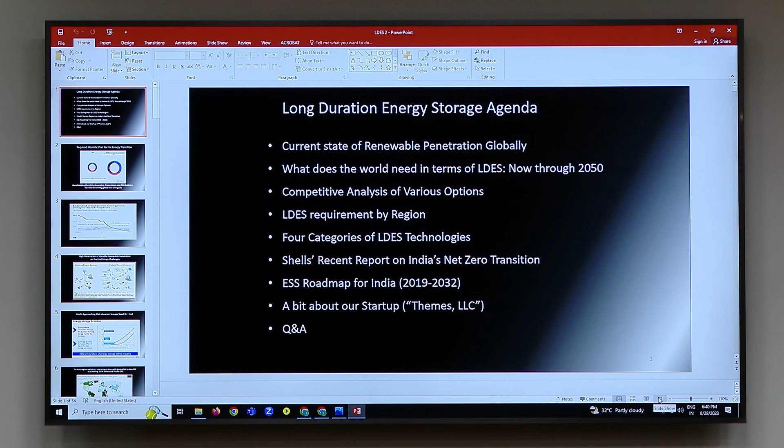Solar and renewable energy costs have come screaming down in the last 20 years. We're down to dirt cheap - in the Middle East it's 1 cent a kilowatt hour, in California where I live it's 4 cents a kilowatt hour. It's practically almost free electricity from solar. That's an amazing transformation in the last 20 years.

So there you go - see, I wasn't lying, right? 27 to 90 petawatt hours. I knew my numbers. And the renewable energy goes from about 28% today to 91%, and the fossil fuels have to go down to 5%. This all has to happen by 2050.

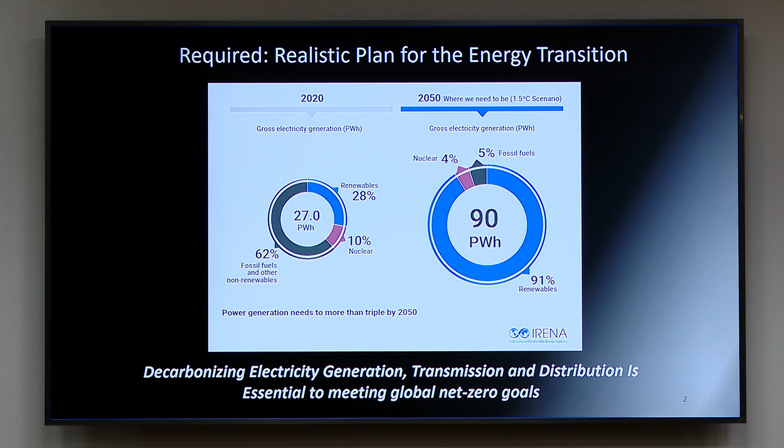You guys are all young, you'll see this happen. This we've seen. Okay, I'm going to skip this slide.

Basically, it says when I was growing up, the electricity system was pretty simple - there was a source, and you sent it to buildings and factories. Now you got a geothermal plant, a high-efficiency building, energy storage, a plug-in car, smart substations - so it's going to go all over the place. Smart grid. Life's getting complicated.

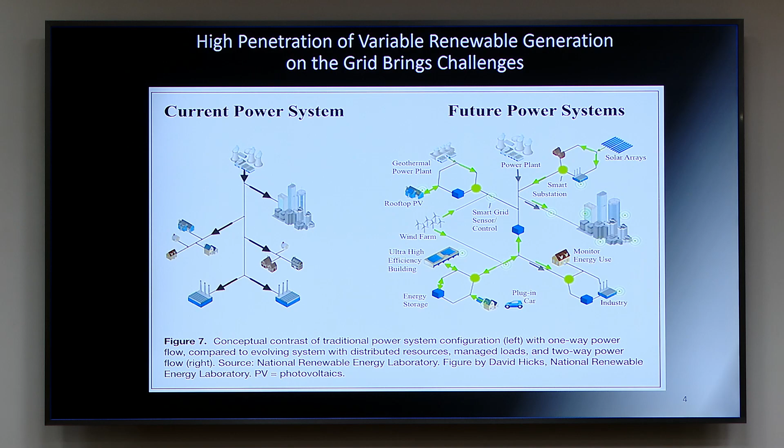Okay, this is an interesting slide - when do we need more hours of storage than a battery? What this slide suggests is you can get by with about 4 hours till you're at about 25% on the grid with battery storage alone. The minute you go up to 30-40%, you need more like 6 hours, and when you get to 50-60%, you get up to 10 hours of storage. At 100% grid, of course, you need lots of storage.

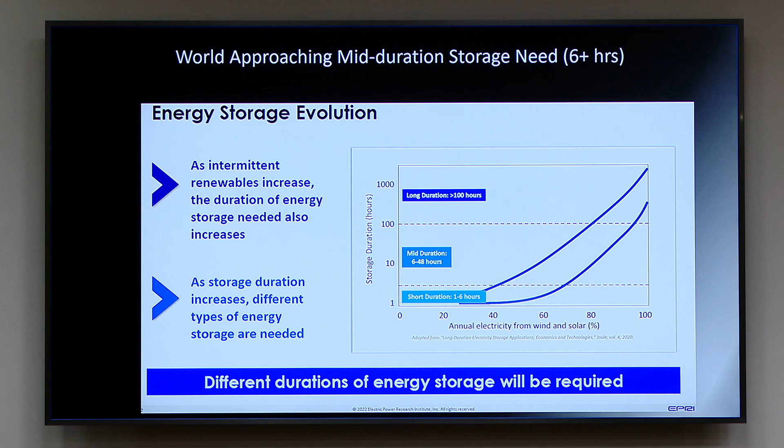So where is the world right now, and where is India today? It's a tough chart, I'll tell you what it says. For example, India is at about 20%, USA is at about 22%, you can see that here. Australia is 30, China is about 30.

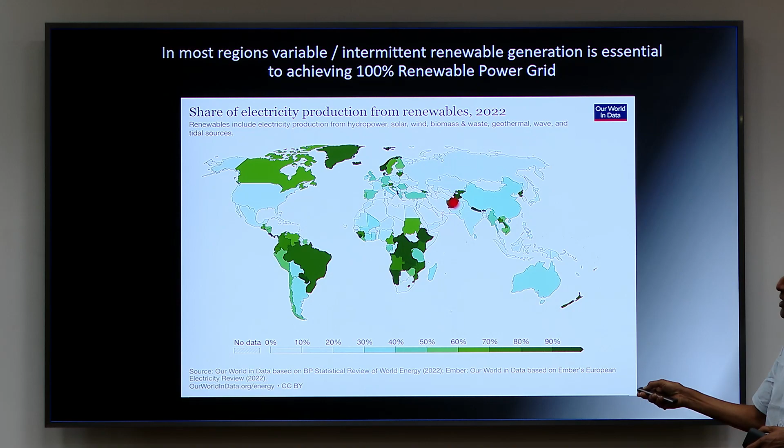And Canada is at about 67%. So you wonder, what are all these dark areas? They're all hydroelectric power - so Afghanistan, of all places, is 86% because of hydroelectric. There are lots of dams.

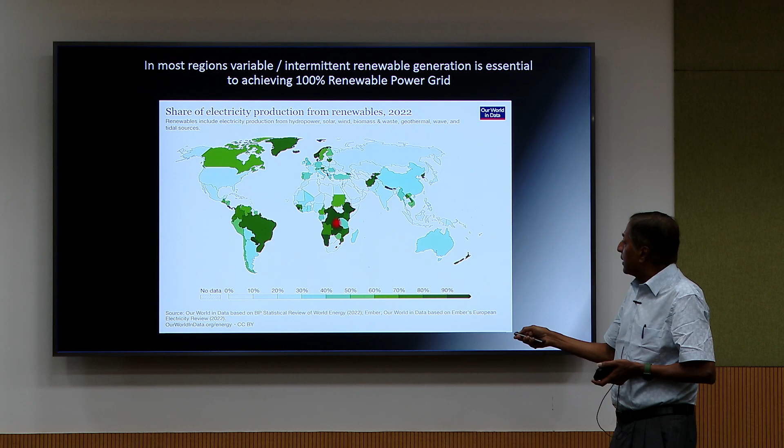Similarly, if you go over to Iceland - I've been there - there's geysers everywhere, geothermal and hydroelectric. Greenland is all hydroelectric, and in Europe there's a bunch of hydroelectric too. So anywhere you see dark, it's hydroelectric, not solar or wind. The guys doing solar and wind are kind of at 20, China is at 30.

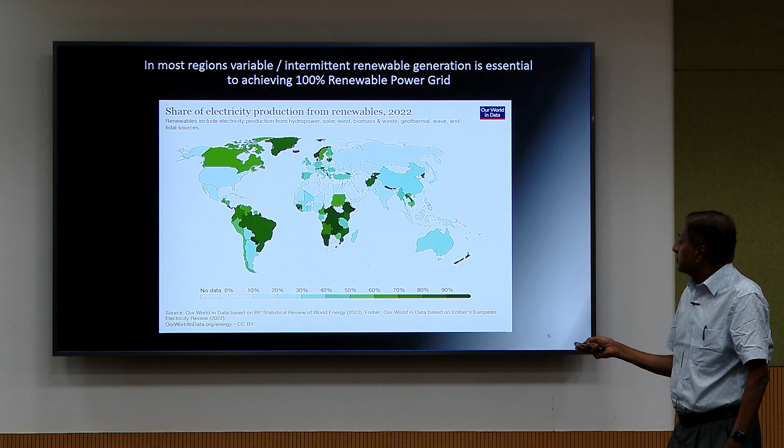So we're right at the cusp of needing more than batteries, we're just moving into that.

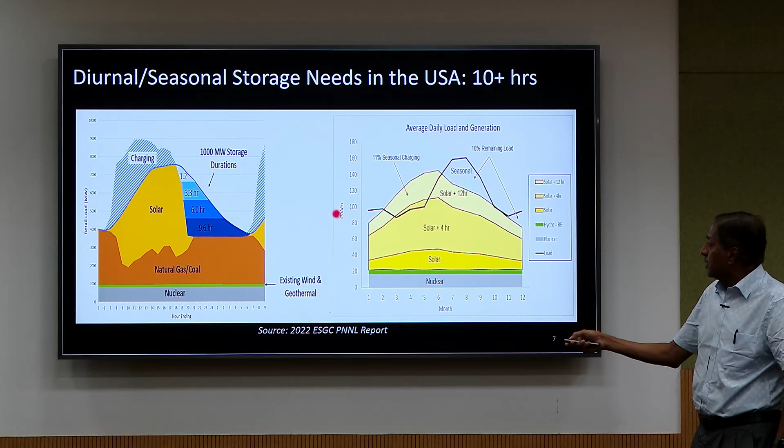So I'm going to skip this slide because it's another illustration - well, maybe I'll talk about it. This is a diurnal cycle, in Arizona in the US. So the sun comes on, you charge whatever your storage system is, and then the solar energy climbs up, and at this point the sun stops shining - boom, you're done.

Now you got all these durations until the cycle starts again. So here's 1.2 hours of something, 3-hour battery. Now you need 6 hours of something and 10 hours of something in order to get there, right? We don't have any of this. All we have now is this stuff with batteries.

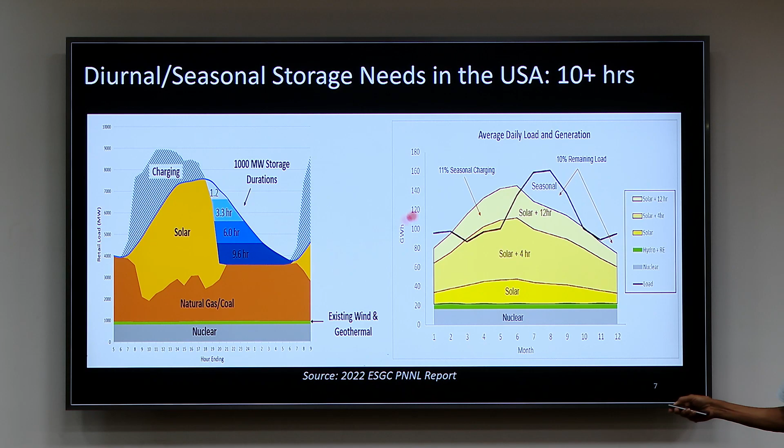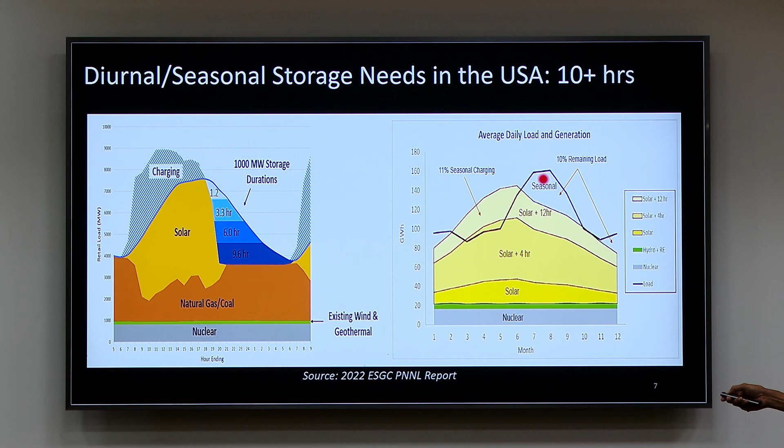Similarly, if you look at a calendar cycle, this is a full year, again in Arizona, and Arizona is picked because it's a sunny climate, kind of like most of India. So here is hydro plus renewable, the nuclear is the gray, here is solar, and then you need battery. Solar plus 4 hours, solar plus 12 hours, still doesn't get you there. There are months in a year that even 12 hours of storage is not enough. We're starting to get to that point in high solar conditions already.

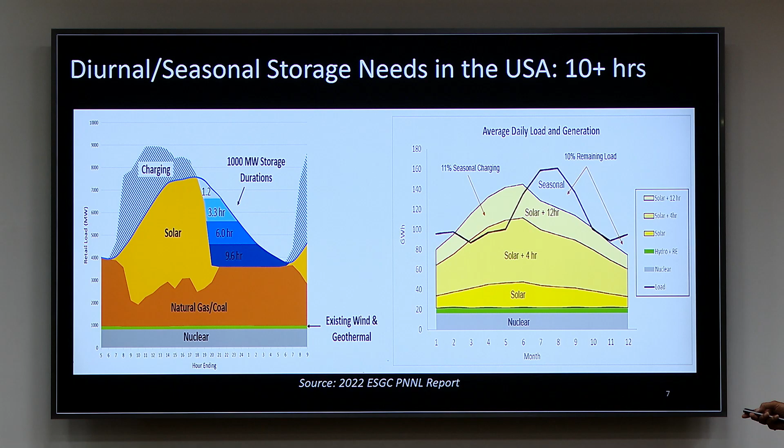So batteries are here. Batteries are pretty cool. They're good for, I think this is very generous, batteries are good for 2 or 3, 4 hours, not even that much.

This is the one I'm going to talk about, compressed air. I'll tell you what that is. Pumped hydro - how many of you know what pumped hydro storage is? Does anybody know? What pumped storage is, you have a mountain, you have a lake at the bottom and a lake at the top of the mountain. When the sun shines, you pump the water up the mountain. And when the sun stops shining, the potential energy, the water flows down and generates power. The problem is geographically, you have to build it next to hydroelectric dams, which is what India is trying to do.

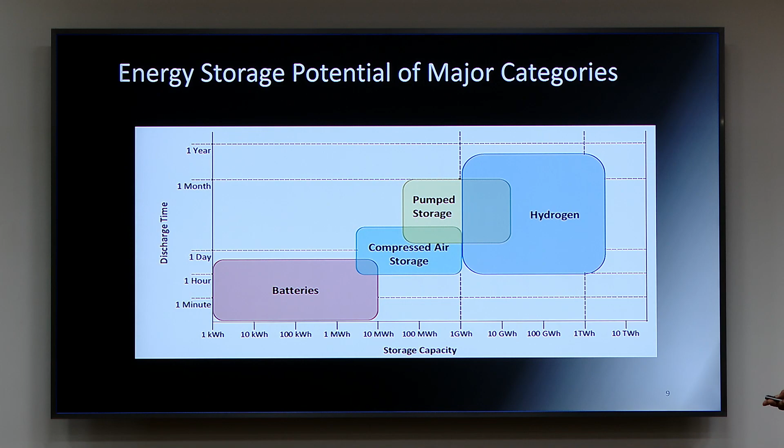And then hydrogen is the big unknown. Everybody talks about hydrogen. I don't know about it. We'll get there in a minute, we'll talk about it. This thing doesn't move very quickly.

Okay, so what the Department of Energy, the Pacific Northwest Lab puts out a report every August - this is 22 August. And they basically say that the cheapest form of energy at scale, if you want to build 100 megawatts and have multiple hours of storage, is compressed air energy storage and pumped hydro. That's what these guys are. The batteries get very expensive - lithium-ion batteries just take off in cost after a point. So it's one of the cheapest ways to do it.

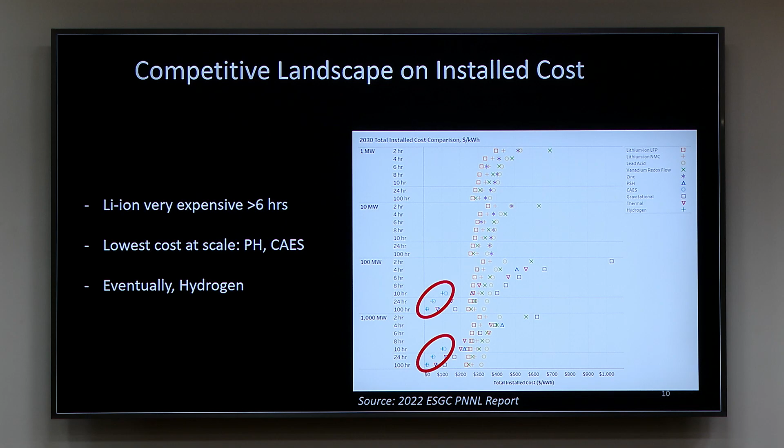Looks like it takes 3 presses. I'm going to skip this one. This is about a lot more detail, I don't have time to read.

They can do 15 gigawatts of batteries if you want, but how do you get 2 gigawatts of something longer than batteries? They got nothing. So they're desperately talking to us about what we're trying to do. There's billions of dollars being put out by the Biden administration, and I'm hoping to get a chunk of it. I'll tell you in a minute.

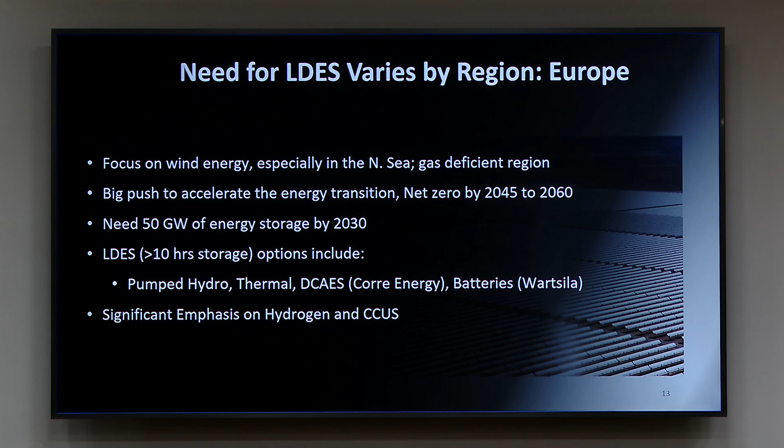I'm going to skip a couple of these next slides because it's taken a long time to change slides. Maybe I should sit there and do it, or have somebody sit there and do it for me, because this isn't going very well. See if we can get her to come. Yeah, see, this is, okay. So UAE, Saudi Arabia, I'm going to skip.

See, now it's going fast the minute you call for her.

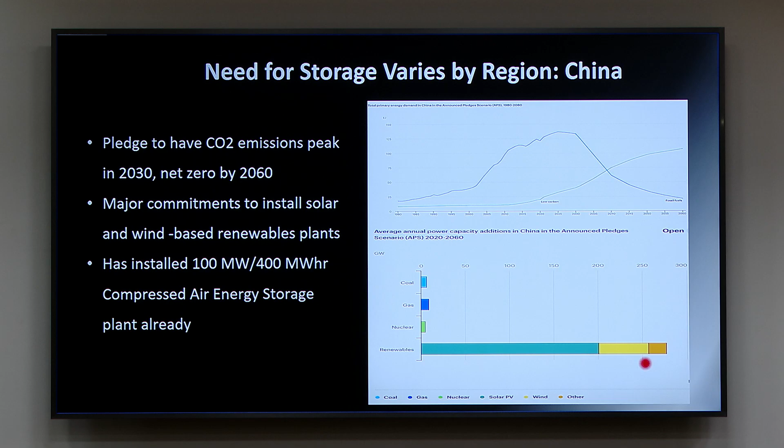So India - what are we doing? We've got 70% of our energy coming from coal. You all know that, right? That's why it's a bit funny for me to see all these electric vehicles. As long as you get electricity from coal, what are we doing? Pollution is less on the road, but your electricity is coming from the worst fossil fuel on the planet - the most carbon dioxide.

I think Prime Minister Modi has said net zero by 2070. He wants to build 450 gigawatts. Currently, batteries are 2 to 4 hours. Long duration storage is pumped hydro - it's the only thing being looked at. I'm trying to introduce this compressed air business. I'm talking to folks in India. And that's what's going on in India.

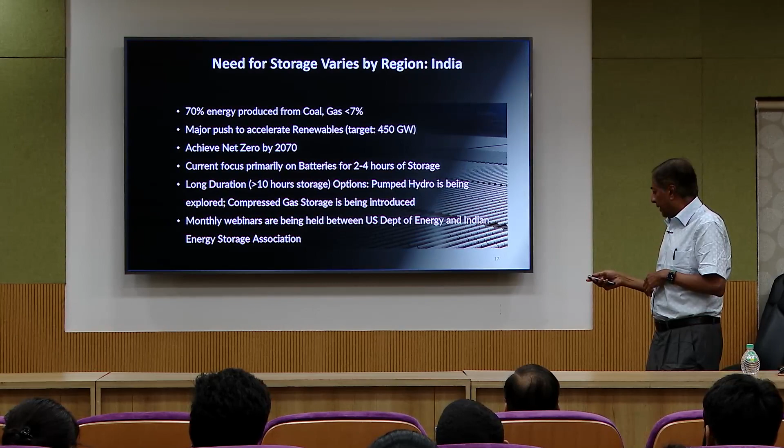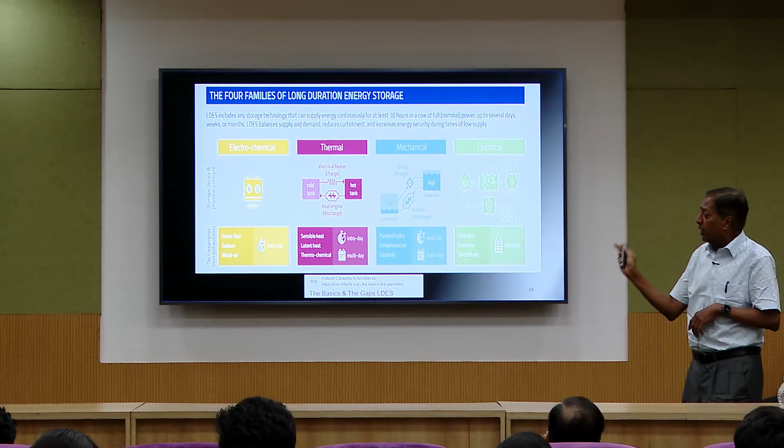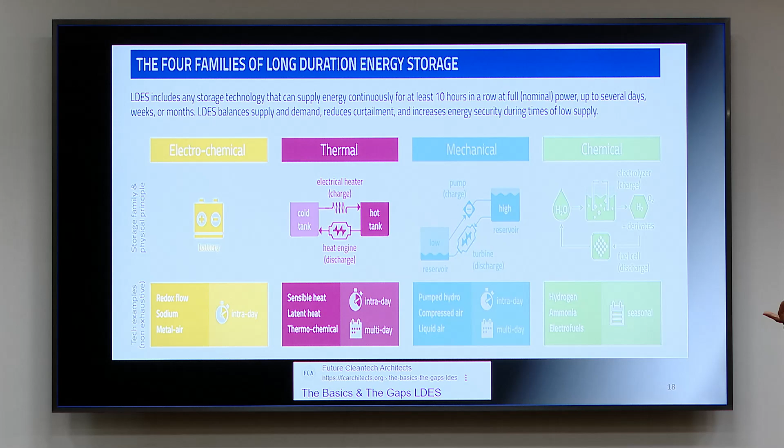So there are four primary forms of energy storage. Electrochemical is batteries, and you all know about it - I'm going to skip that battery topic. Thermal is an interesting one, I'll tell you a little bit about thermal. Then mechanical is the other one, where compressed air is a part of it. And then chemical is hydrogen and ammonia. By the way, when I retired 5 years ago, I had zero knowledge of this subject - this is what I've gleaned in just the last few years of my startup.

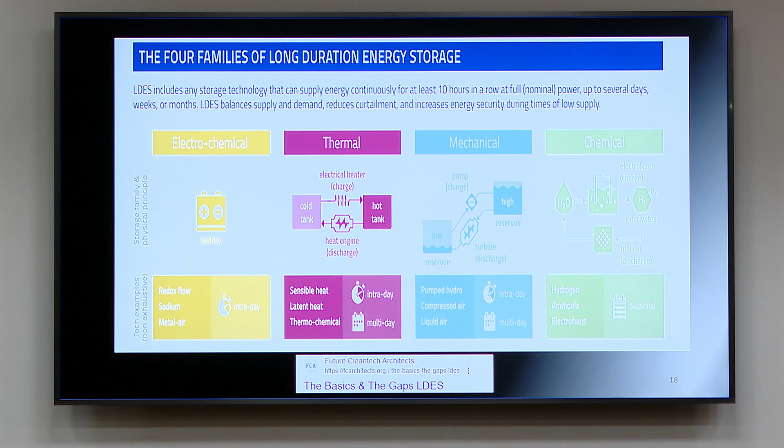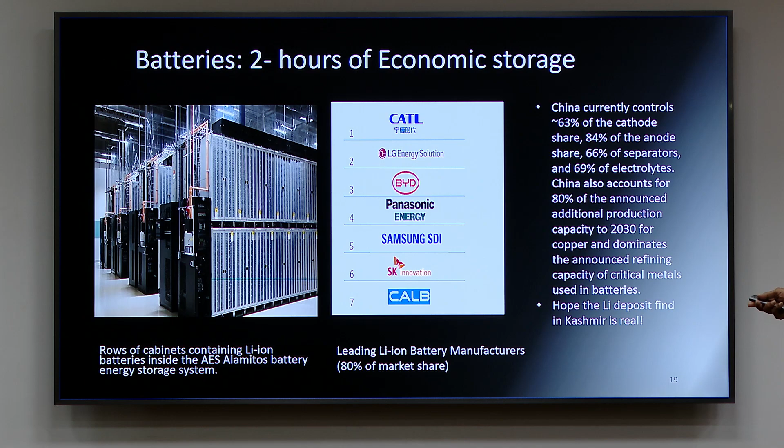I think this is batteries. I'm not going to talk about batteries, except that China holds 63% of all the raw materials. They're kind of screwed if you depend on them. And all the manufacturers are largely Japanese, Korean, and Chinese. You guys know this.

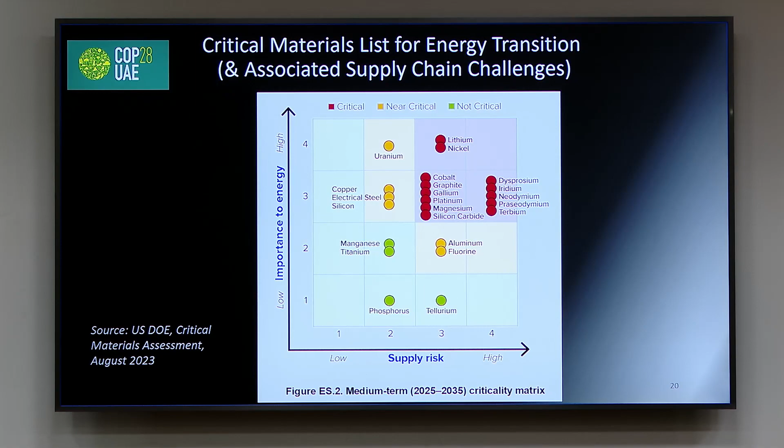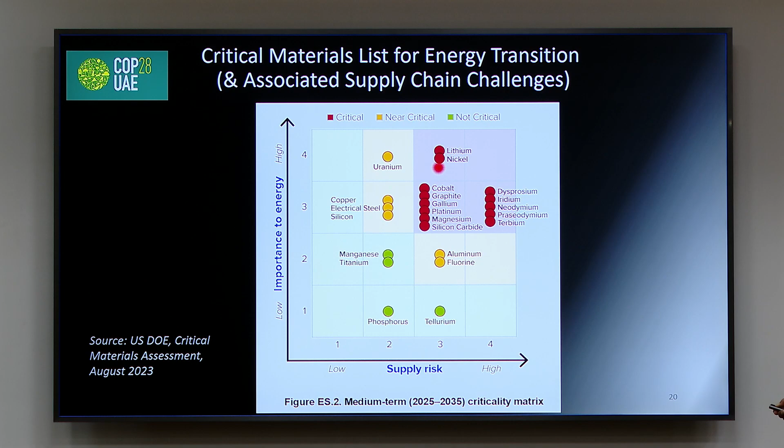Now, this one is put out by the Department of Energy just this month, in early August. What they're pointing out is batteries are fine, but what they plot is low to high supply risk and the importance to the energy business. Basically, red means critical, green means not critical. Look at the stuff that's critical when it comes to batteries - of course lithium and nickel, but look at all this: cobalt, graphite, gallium, platinum - all this stuff that China largely controls. That is the problem with battery solutions alone - you're going to be stuck with materials that are hard to get.

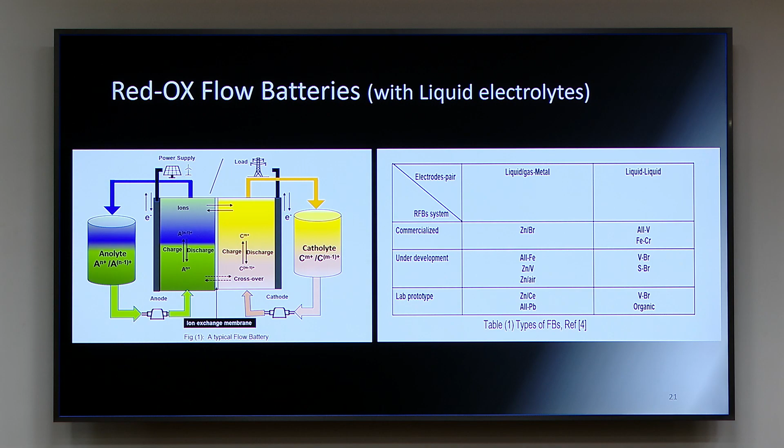And there's something called a flow battery that's always been there. It's supposed to get up to 10 hours, but I haven't seen it yet. I'm going to skip this one to go to the next one.

So the big news in America is a company called Form Energy. It was invented by a Chinese professor at MIT. What he did was dust off a 50-year-old technology, which is basically iron-air batteries. His idea was air is free, iron is cheap. The idea is rusting the iron and derusting the iron in the cathode and the anode - you let the iron rust, then derust at the other end. Seems very simple. They have raised $1 billion with this idea. They are building a $760 million factory to produce these batteries in West Virginia. This is the talk of the town - they've raised a lot of money, but the jury's still out on this very old technology.

The reason it's been revived is that when it was worked on 50 years ago, the energy density of this battery was only about 350 watt hours per kilogram. These guys have gotten up to about 1200, 1250 - so they've got to pack the energy density. We are all watching it. If this succeeds, it's wonderful, but it's a lot to ask for.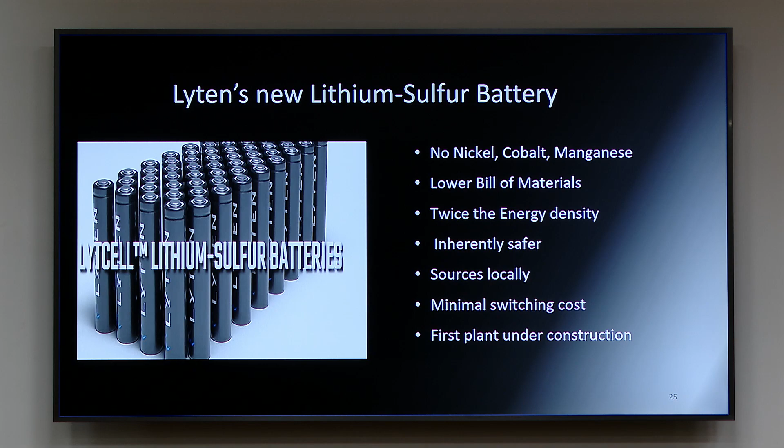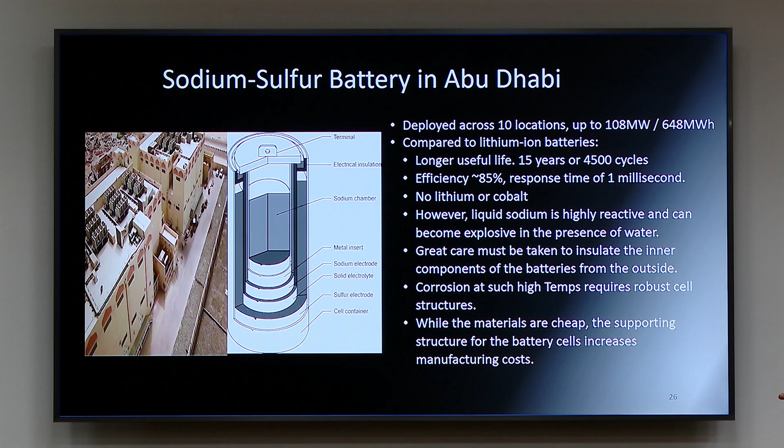So it scares me that you can't scale this up. You don't want to build something that's inherently unsafe. Not that lithium batteries are all 100% safe—they catch fire, as you know.

But this is pretty unsafe to me. So, okay, thermal, right? This is an interesting one. So I've talked about batteries already, that's electrochemical. The second type of storage is thermal. You know what thermal is, right? Hot and cold.

So there are a bunch of people. There's an Indian lady called Ramya Swaminathan, who's the CEO of Malta. She's raised 86 million dollars. And it's a very old technology—molten salt is very old. Canada has been doing this for 30 years. So when the sun shines, you store the heat in the form of molten salts. And then you also have the coolant side. And then you take that heat and turn it into electricity. That's one way to do it.

Their costs are going up. They're struggling, actually. It's a tough thing to do. Molten salt is not easy to manage.

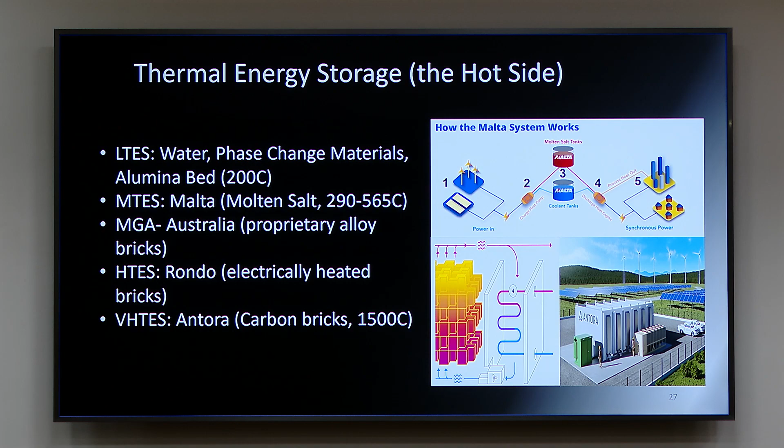There's a couple of companies—one called Rondo, one called Antora. These are both in California. Their idea is to take a wire and stick it in a brick. One guy uses a cement brick, the other guy uses a carbon brick. They claim that they can heat that brick up to 1200 to 1500 degrees centigrade. They're generally pretty good insulators. So when the sun shines, you heat the heck out of these bricks, and when the sun stops shining, you convert that heat into electricity. They've raised a bunch of money, which is amazing to me. So these guys are going on.

And then the other side of it is the cold side. There's a company in Israel called Nostromo, which takes energy when renewable energy is available and makes ice, basically, ice and ice slurry. So you can either take the energy and make hot stuff, or you can take the energy and make cold stuff. And guess who else is doing it?

Professor Satya Seshadri here in IIT Madras is doing it. How many of you know about this? Oh my gosh. What Satya has done—I've toured this laboratory, I come to India 3 times a year. What he does is take renewable energy and make ice slurry, which is pumpable. It's even better than ice—if you form ice, you've got to chip it and make it into something that will flow into a pipe. Professor Seshadri comes up with this ice slurry, circulates it, and has air conditioned the setup outside the building here. His entire building is air conditioned with his own process. Excellent stuff. I would urge you to go and check out his lab. He's done it himself. He's trying to now commercialize it. So that's one other way to do it.

And then this is the one I don't like at all. It's the dumbest thing I've ever heard. This thing on top, a company called Energy Vault—their idea is when the power is cheap, you raise bricks as high as you can, and then when the sun stops shining, you drop the brick and create energy. That's their whole idea, gravity, they call it. They couldn't get money and build a plant in America.

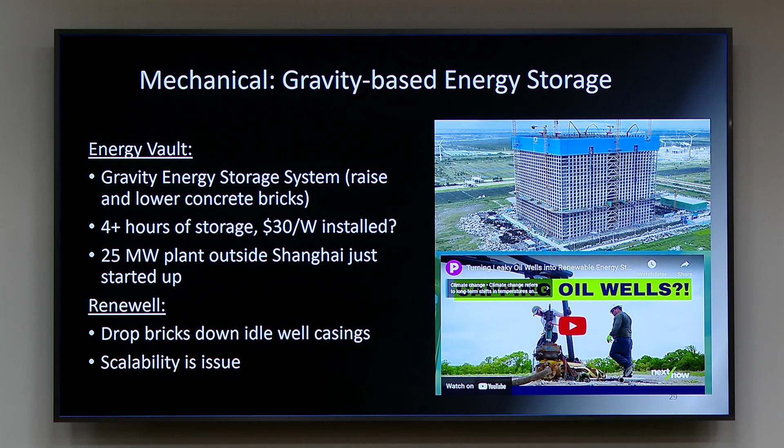Now there's another company that has a similar idea to mine, which is using idle oil wells. But they're dumb too. You take an idle oil well, there's a casing in it, and they want to drop a brick into the casing. Basically it's the same idea as the one on top, except rather than building up, you drop it down a hole in the ground. The problem is the casings aren't linear, so when you drop it, it's going to get stuck somewhere on the way. These guys have raised a bunch of money. I don't understand it anymore, but the VC system in America is crazy.

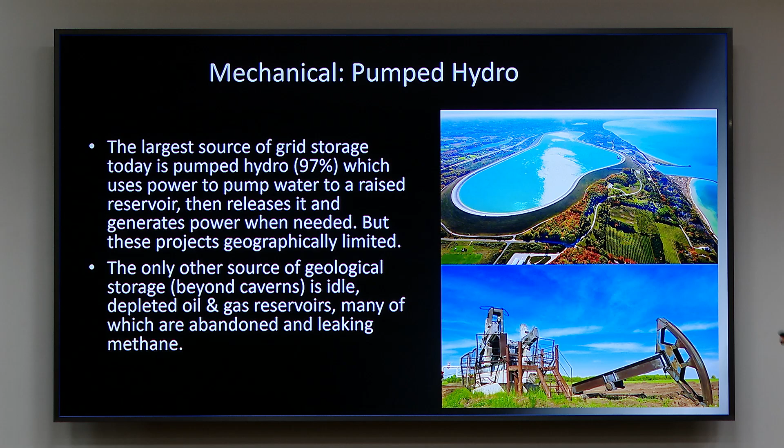So my idea is there are a whole bunch of abandoned oil wells in America, and these have unlimited storage where the oil used to be. 150 years ago we drilled a hole, all the oil is gone, there's nothing left, so people walk away. Here's an abandoned well in Central California - the operator didn't fix it up properly. When oil prices fell, he just walked away. So now you have an opportunity to store energy, an unlimited amount of storage space, in an idle oil well. That's the concept I'm peddling. I don't know if it'll work or not, we'll see. Okay, these other guys are also looking at oil wells, but it's an equally bad idea.

You can compress air, it's a compressible fluid. You can compress it to 75 bar, 100 bar, and get energy density. These guys decided to do what they call reversed pumped hydro - rather than a mountain, why not pump water underground? But water, as you'll remember, is an incompressible fluid, so it can't have much energy density. The first time they pumped water underground, it leaked out and all went away. Bill Gates funded this, by the way. They raised 10 million, did an experiment, the water disappeared. So now they're going to drill their hole to make sure it doesn't disappear, and Bill gave them another 10 million. The energy density of the water is such that I don't know how much energy you can get out of drilling these holes. And if you drill your own hole, you're screwed because the cost is very high, you won't get permits. So this is another bad one, but there's Bill Gates himself, looking at it, and he's put 20 million down. Good luck with that - it's not going to work, I think.

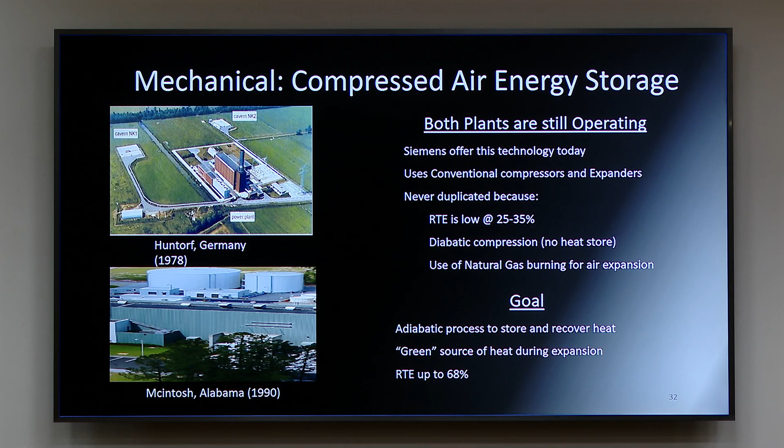Go ahead, I'll skip this one. Let's keep going, there's another company. There's only one company in the UK, and Professor Narasimhan knows about this - we've talked about it.

That has said, I don't want to find holes in the ground. How about if I liquefy the air? If I liquefy the air, the liquid air is 1/700th the size of air. So you can compress it into a liquid - it holds huge energy density. So then when I need the energy, I will vaporize the air, turn it into regular air, high pressure, and expand it. So that's their idea.

The only problem with that is now you've got a cryogenic setup. So it's not just compressing air - now you have to go through refrigeration cycles and actually liquefy the air. Then you've got to heat it up and expand it. You can do it. Then the two edges are basically compressed air storage like I'm talking about. In between, you need refrigeration and cryogenic storage. So the costs double. The good thing about it though is that you don't have to look for holes in the ground - you can build this anywhere.

The only ones that could do it - Professor G. Venkatarathnam here, wrote the book on mixed refrigerants you need to use here. So pre-COVID, I came and met him. He had already built a liquid nitrogen pilot plant here. And I was talking to Professor Venkatarathnam and Professor Shankar Narasimhan, who's sitting here, saying, why don't we turn that into a liquid air pilot plant? I mean, we still want to, but COVID came in the way.

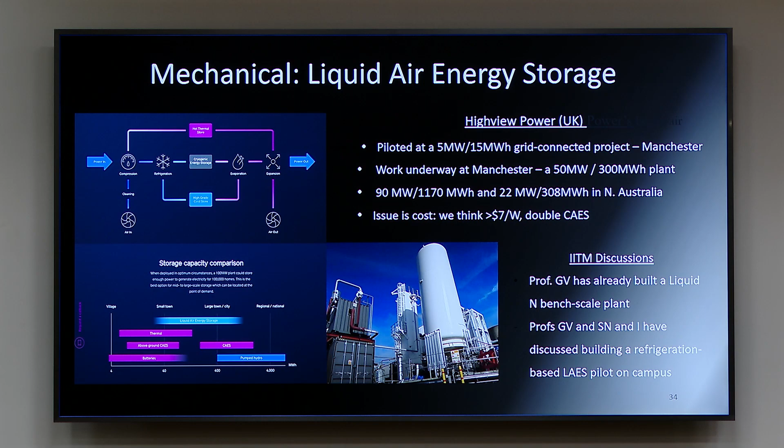Go ahead. Okay, so this is a controversial subject - these are my opinions only, you can argue with me later if you want. The whole world is agog about hydrogen. India is going to do green hydrogen. Tata is getting into it. Everybody's talking about hydrogen. Hydrogen for transportation makes perfect sense.

So right now, to make hydrogen out of water in an electrolyzer is about $6 a kg. You've got to get it down to about $1 a kg, one sixth the price, to make it economical. But that's happening - like solar electricity, this will come down in cost. I think that'll happen. Once you do that, then you can put this hydrogen into fuel cells in cars. You know there's a Toyota car, there's a BMW car that runs on hydrogen. And the way they do it is they have a high pressure hydrogen tank compressed to 600 bar at the bottom of the car.

Hopefully you won't have an accident, but it's pretty thick walls. That hydrogen supplies a fuel cell and the car runs on a fuel cell. It's not EVs, okay? It's a hydrogen fuel cell car. Those cars exist. Down the road, they can do that for trucks. Just everything gets bigger, right? And I'm okay with that.

There are also people trying to replace the internal combustion with a hydrogen combustion engine. Chevron's doing this too. Instead of a direct ignition spark ignition IC engine, it becomes a compression ignition engine. Diesel cars are what's called a compression ignition engine - there's no spark plug, so you compress it to a high enough pressure that it lights itself. That technology is being adopted for hydrogen now. If that works out, I'm okay with it. Build hydrogen engines in cars - the efficiency is terrible, but you can do it.

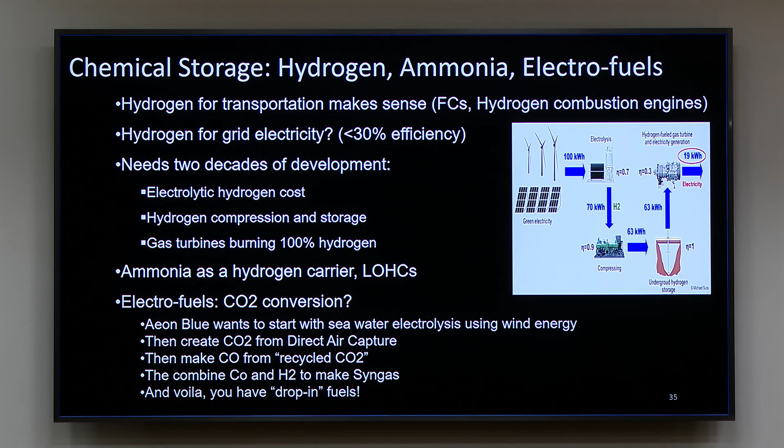Now there's just enough time to talk about my startup. Just bear with me for a few minutes, I'll tell you what I'm doing. So I came up with the name Thermal Mechanical Energy Storage - it's got a nice ring to it. It's called THEMES. And our goal is nothing less than 24/7 dispatchable power.

Dispatchable means you can dispatch that power anytime you want - it's not curtailed for several hours or anything. 24/7, can run on renewable energy. We use off-the-shelf surface equipment - compressors, expanders, heat exchangers, hot water tanks are all off the shelf. We repurpose subsurface infrastructure where oil used to be.

Highly scalable, right? We can go to 200 megawatts easily. It can enable 100% renewable power for industrial operations today and enable a 100% renewable grid in the future.

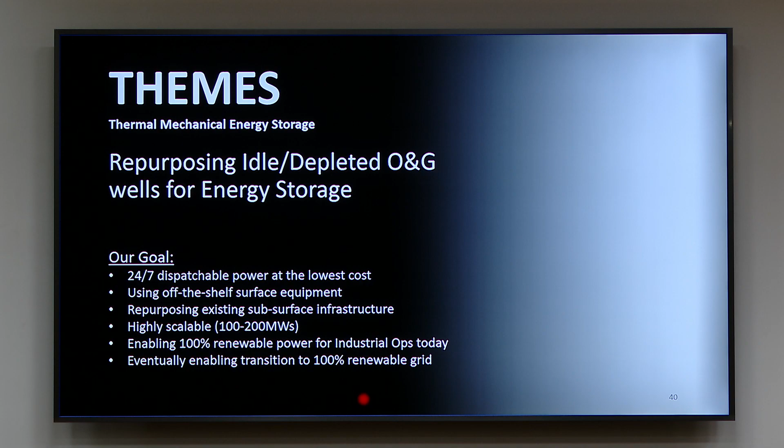So how do we do this? My co-founder spent his whole life in the oil industry looking at the subsurface. We call it upstream, but it should really be called downstream. Upstream in the oil business is how you drill for oil, how you maintain these wells several thousand feet below. He knows all about that. I don't know much about that, but I know how to build plants on the surface. So we were a good match.

We formed this company about a year ago. This is not the company I was with in the beginning. We both started with a company called EIC, and they had some issues, some technology development that had to be done. They were going for 100 hours of storage. What we found out, as I showed in the first few charts, is that the world doesn't need more than 10 to 15 hours for the next 20 years. So why should we do a startup to try to get 100 hours? The world doesn't need it. So we both quit and started our own company, and we've been at it for a little over a year now.

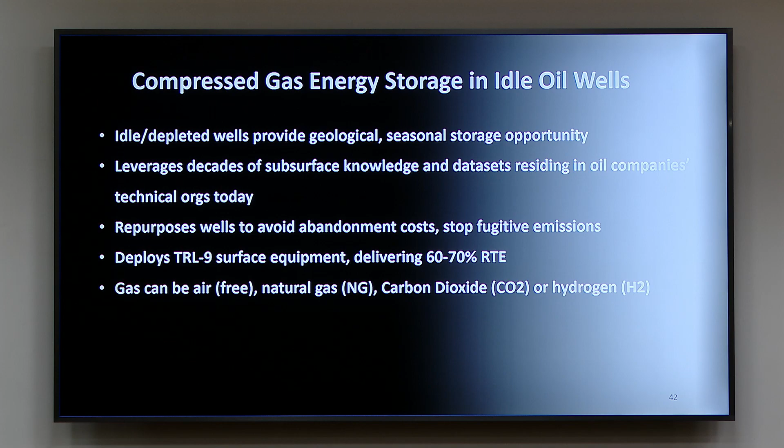The idea is you've got depleted oil wells and decades of subsurface knowledge. Every oil company has data logs on all those wells that have become idle - detailed data on rock porosity, permeability, all that. Right now many of those wells are leaking methane, which is 30 times worse than CO2. So the idea is you go in, plug it off, stop the methane leak, seal the layer where the oil used to be, and now store compressed air. The gas can be air, natural gas, eventually CO2.

The US has about 3 million abandoned oil wells, and a chunk of them are leaking methane. Methane emissions from abandoned US wells are equivalent to 8 million CO2 equivalents a year - a major problem the Biden administration is trying to solve.

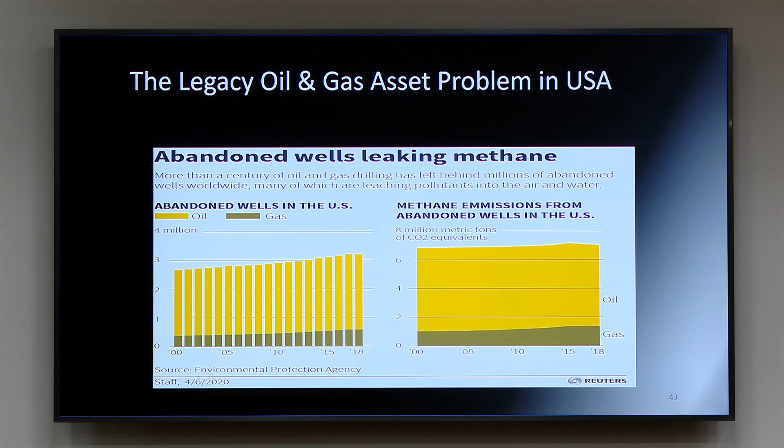The way we're doing it is a compression system and expansion system. When you compress, you store the heat - I store it in hot water. Then when the air comes back up, it gets heated by that hot water and goes through expansion. What happens in the well itself is where all the trick is. Everything on the surface is known - Siemens will build it for us. I went to Nuremberg last month and signed a deal with Siemens; they're going to build that surface facility for me, they know how to do this. What nobody knows is how you do this part in the well.

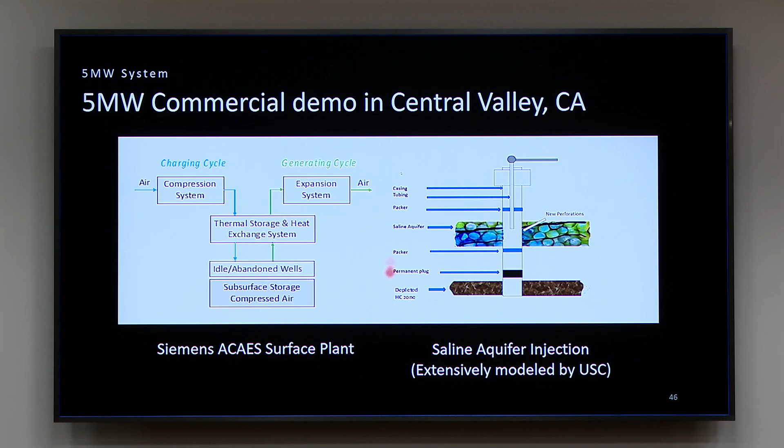Then we're going to pump the salt water out of the aquifer and create a giant air bubble here, in here and here. It stretches for miles. Every day we'll only put 1% of the air in and take 1 or 2% of the air out, so it's an isobaric, constant pressure operation. The air will sit there in a giant bubble, it's not going to go anywhere. It's contained by the pressure of the aquifer.

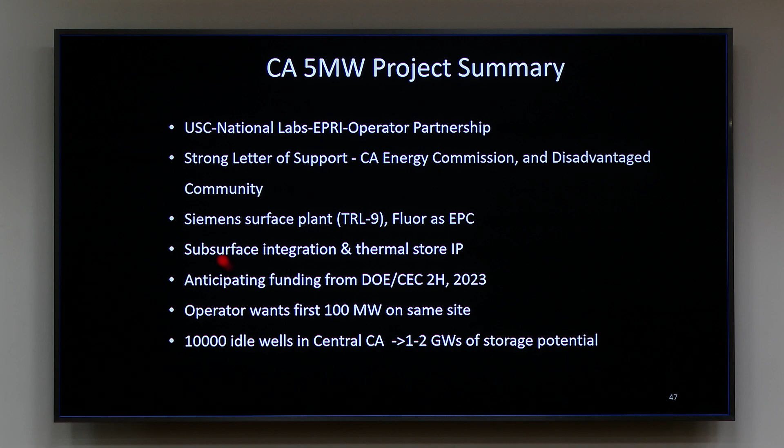So we've got a 5 megawatt project. We've got University of Southern California, 2 national labs, an electrical power institute, and an oil company operator all signed up with us. We have very strong support from the state. Siemens is going to build the surface plant. Subsurface, we have all our IP. We expect to raise $100 million, touch wood, next month, and if we get that money, we're going to start the project very soon.

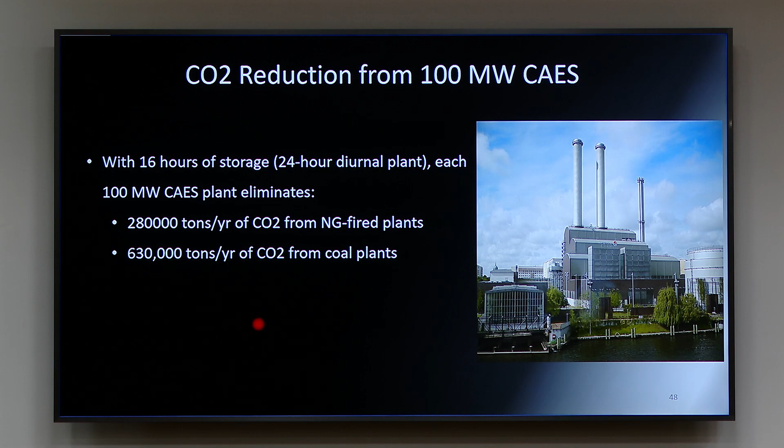Somebody asked me how much CO2 do you save by building it, because they can't think of energy storage. So I did this calculation, it's pretty simple. If you store energy for 16 hours in a 24-hour cycle, every 100 megawatt plant eliminates 280,000 tons per year of CO2 from a natural gas fired plant, and it's 3 times that from a coal plant in India. We want to build 2,000 - basically 20 100-megawatt plants - in the middle of California alone, let alone India, let alone the Middle East, let alone the rest of America. The potential is 20 100-megawatt plants in the middle of California alone.

So back to India. What do we need in India? As I said, pumped hydro is what they're working on. So the question is, what is the opportunity for this idea in India? I'm going to skip through these. One study was done in 2018 by a Finnish company - I usually give attribution at the bottom for all my slides. They looked at permeability and porosity, and said yeah, India's got some chance.

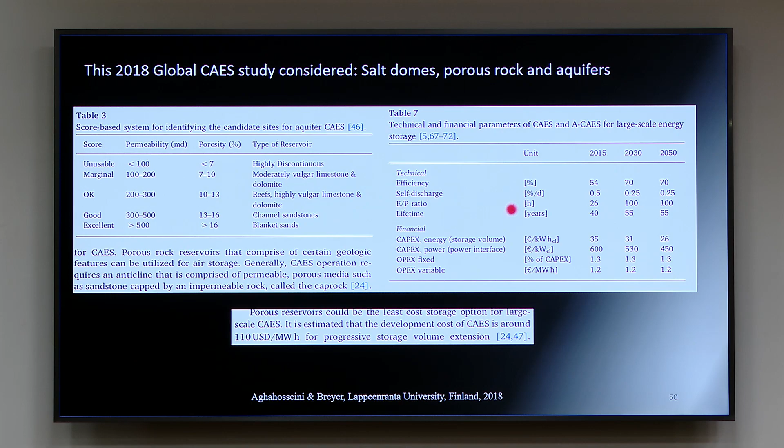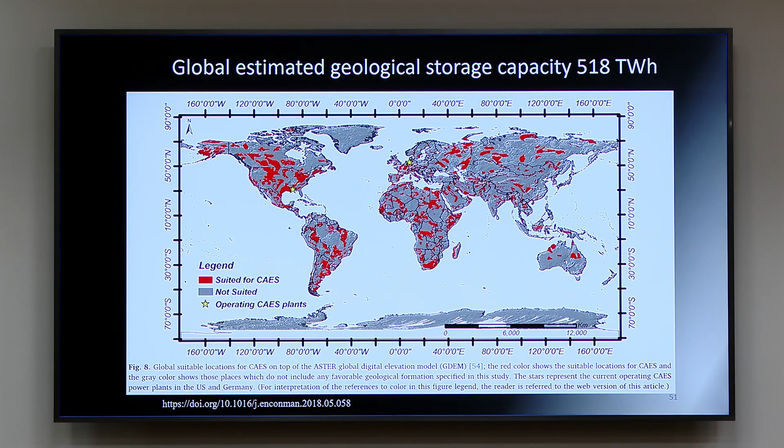So a study was done more recently, including the United Kingdom and Malaviya National Institute of Technology in Jaipur. They published this paper a couple of years ago, and looked at caverns - they didn't look at the previous study, they didn't look at oil wells. They concluded there are caverns out here in the middle of, again, Uttar Pradesh and Madhya Pradesh, nowhere else in India. Their numbers are just flat out wrong - I have to write to them.

They claim that even with that small capacity, there is 11.6 billion megawatt hours of opportunity in India, but they're off by a factor of 10 at least, or 100. So I've got to fix that. But anyway, go to the next one.

So where is the opportunity for that idea I'm talking about? No one has looked at it in India. Turns out the opportunities are where the old oil wells were.

We don't want to go offshore like Krishna Godavari Basin, Reliance's KG Basin. Once you go 50, 75 kilometers offshore, the cost goes up, so we can't go there. Bombay High is offshore. Gujarat is onshore in the Kutch region, Saurashtra. Rajasthan, Cairn Energy, is onshore.

And Assam is onshore. Guess when was the first well drilled in Assam, and what is it called? Digboi. You know why it was called Digboi? It's a racist insult. There was a British guy standing there getting these guys to drill, and they weren't drilling fast, so he said, dig boy, dig. And we called it Dig Boy. I wish you would change the name.

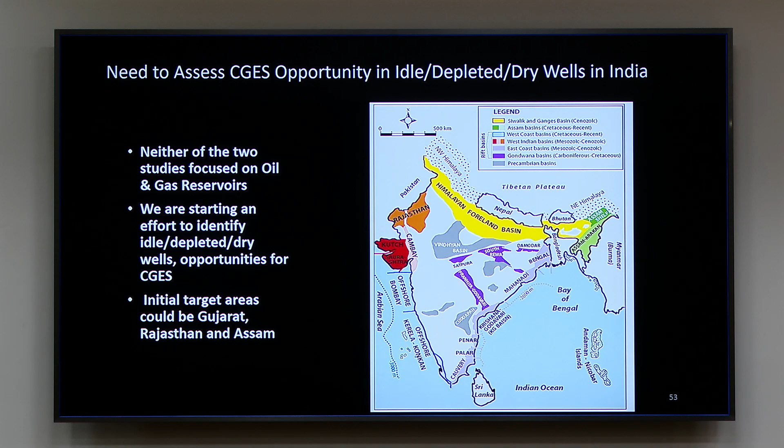Go ahead, so in summary, I'm finishing up now. I've got 10 minutes for Q&A.

So as the world pushes for greater than 20 to 30% renewable energy on the grid, you need more than 6 hours of storage. If you learned anything at all today, India and America are both at about 20 to 30%. Beyond that, you need more than batteries. That's lesson number 1.

Our national target is 450 gigawatts of solar power by 2030. Two days ago, they announced they want 60% renewable energy on the grid by 2030. 60%! We're at 22% now. How do you get to 60% on the grid?

Once you cross 25, 30%, batteries are not enough. You need 10 hours of storage. Where are you going to get it? They're looking for mountains and lakes, that's what they're doing in India right now.

So we know that pumped hydro is being looked at in India. They've not heard about what I'm doing at all, and the two studies are very limited, as I showed you. So what I've done is I went to Bombay a week ago. I've talked to L&T, I've talked to ONGC. Nobody knows the answer. It could be that we look and we don't find any oil wells ideally suited for this. Maybe, but we don't know the answer.

So what we are saying is we would like to explore this opportunity to see if it's possible while I'm building all this in California. I personally would like to work with Professor Shankar Narasimhan and G.V. again, if he's active in this. We need to pursue this liquid air thing, because that one we could do anywhere in India. And this can go for 10 hours, 20 hours of storage. It's more expensive because of cryogenics, but it can be done.